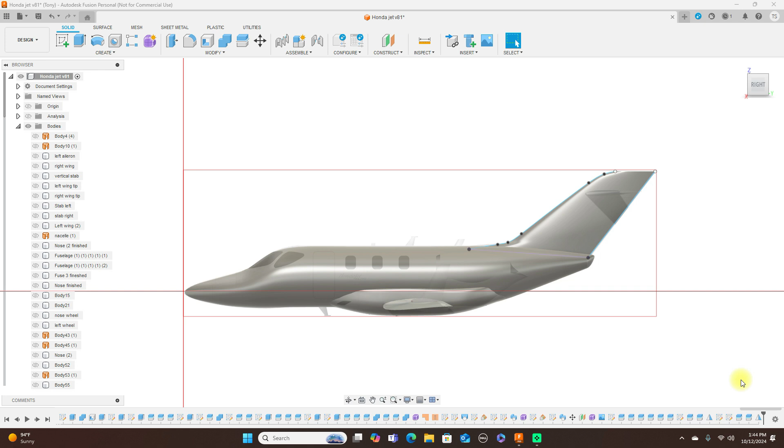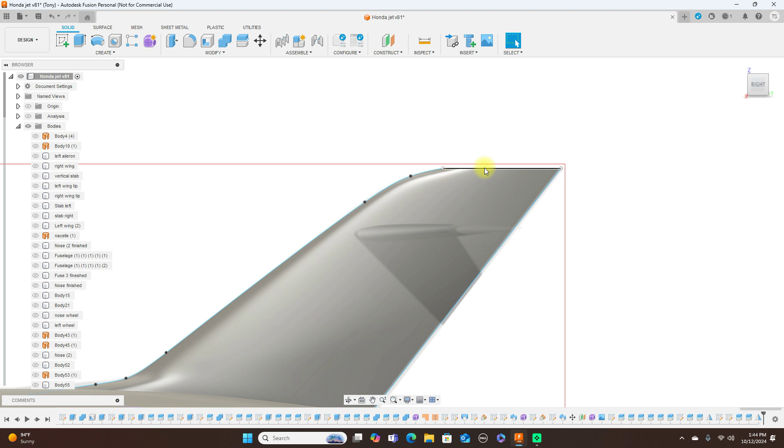We're going to do some more work on this Honda Jet. But first, one person left a question in the comments about this being flat up here, and I said I would address it. So I'm going to do that now, and it's quite simple to do.

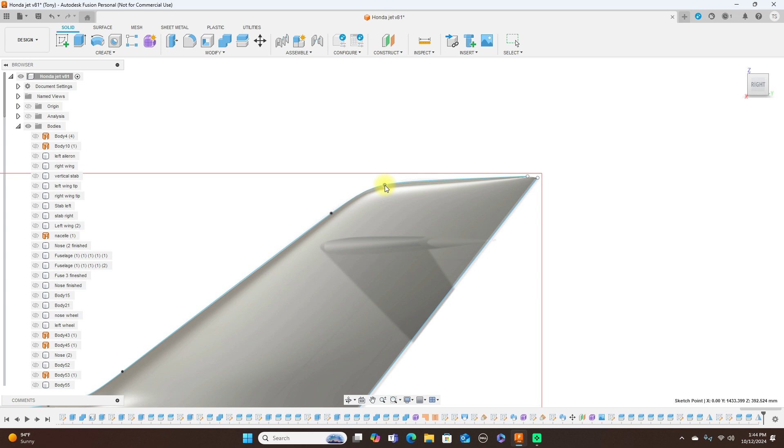Just take this and move this over. And do that. And that takes care of that.

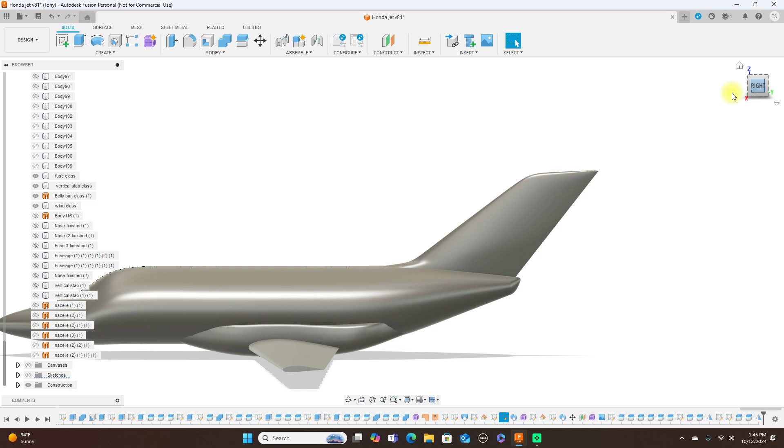So let me turn the canvases off here, and turn the sketches off. As you can see now, that's round on the top. Simple as that. I just didn't drag that all the way over when I showed you guys how to do that, but that's how you take care of that.

Okay, let me turn the canvases back on. Now turn the body off here.

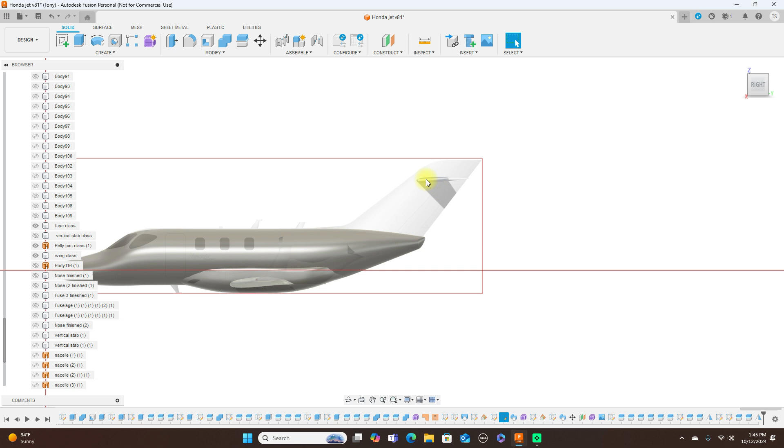What I'm going to do now is show you how to model this horizontal stab. And like my last video, I said it's done just like the wing, and I'll show you what I meant.

So the first thing I do here is create a sketch on this plane here. And I'm going to draw a line just like I did with the original wing.

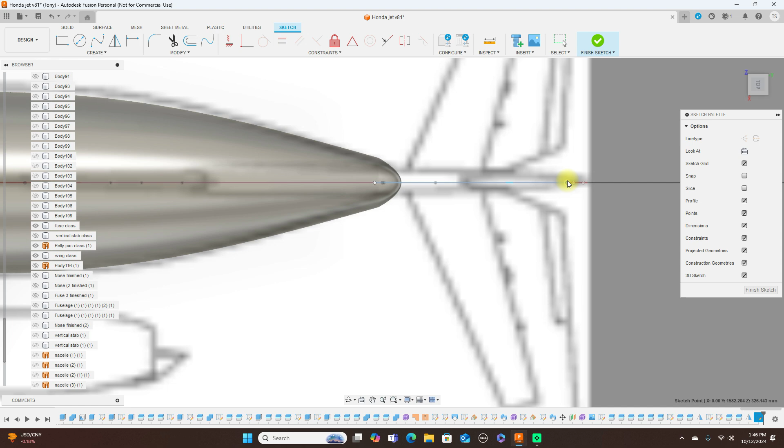And move this out like that.

Actually, I'm going to just model it to this instead. So I'm going to put that there, back there.

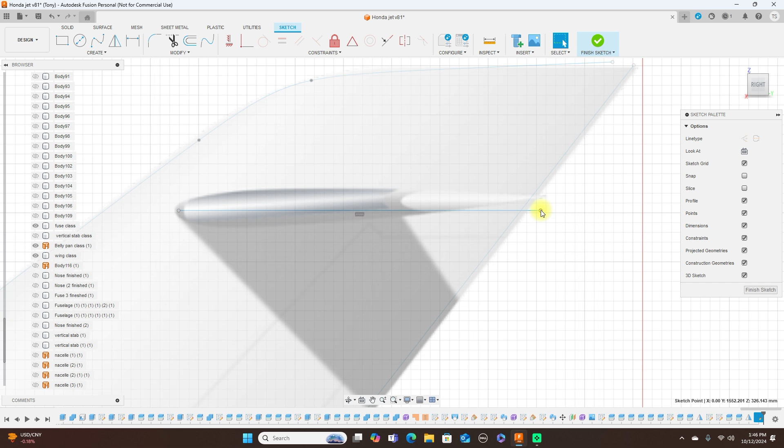And I'm going to redo this. So I'm going to delete this line here and do it again because it's somewhat at an angle here.

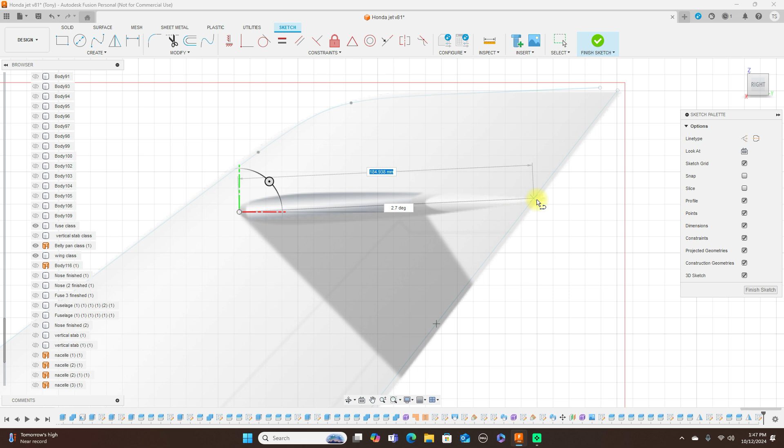Okay, now I got that. Now I'm going to use fit point spline and just sort of trace the outline of this here.

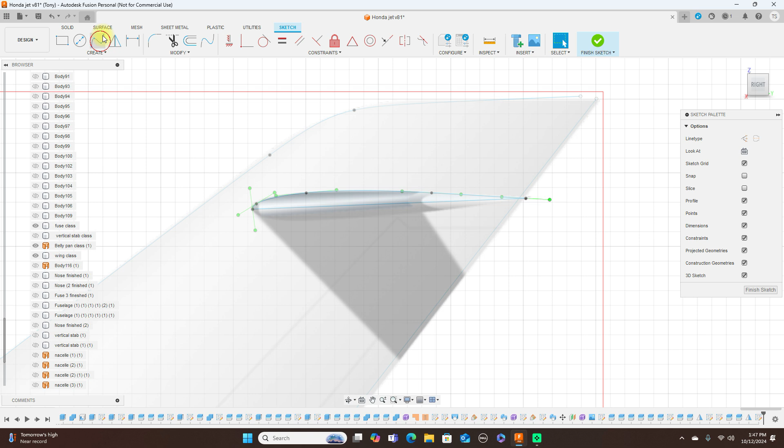And we have that, and go ahead and finish sketch. Turn the sketches back on.

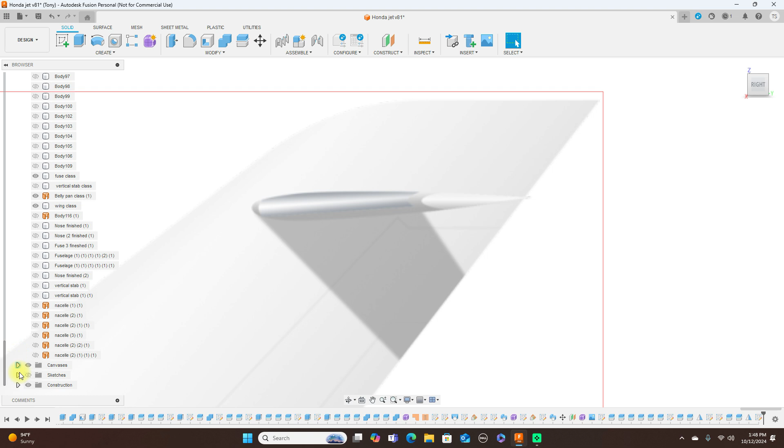And we're going to use a plane at an angle and use this line here and change this to 90 degrees here. And click OK.

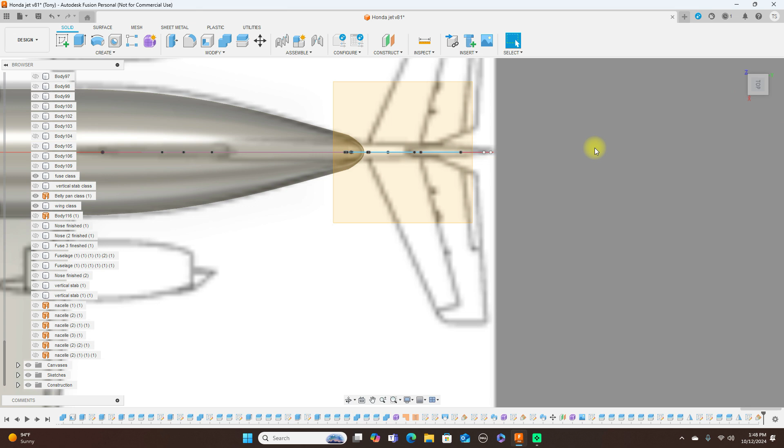Now create a sketch on this plane here. So I click the plane and click Create Sketch. I rotate this slightly. I want to make sure I get the proper line here.

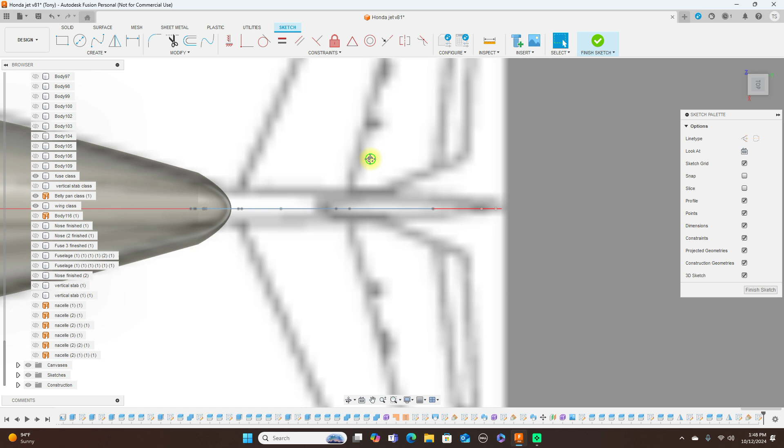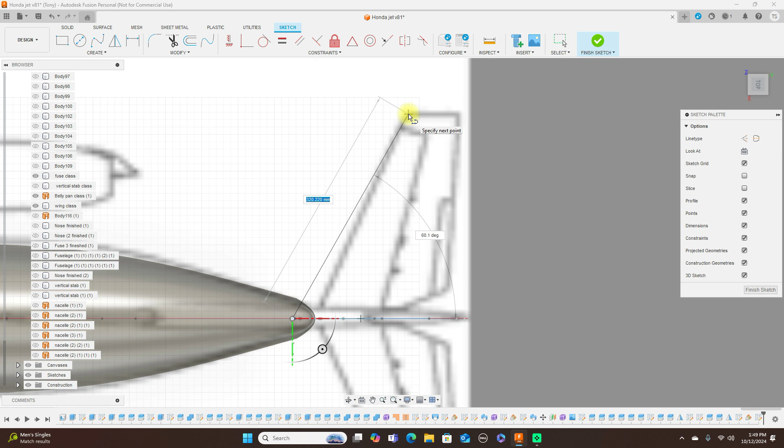Now these pictures here that I'm using, they don't line up properly, but that's okay. And then another line in the back.

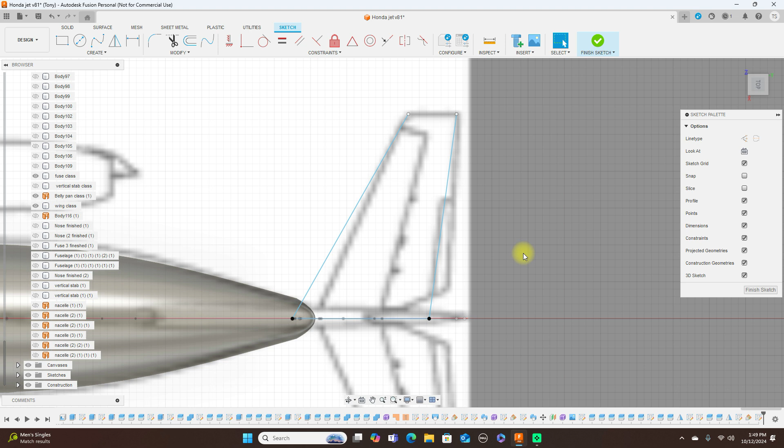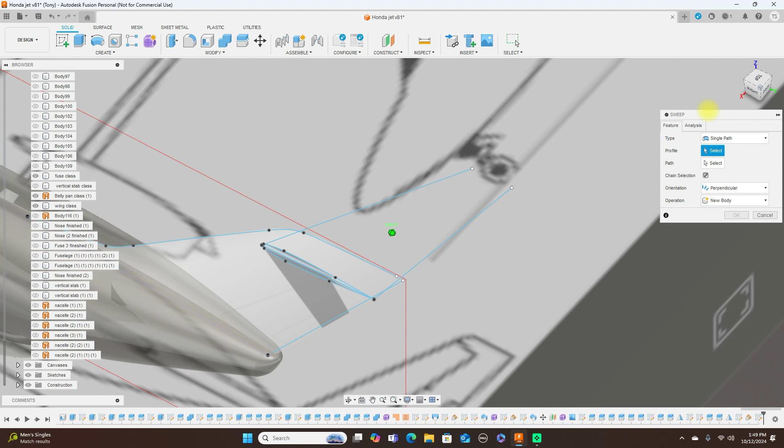Then come over to create sketch, and I'm going to use a sweep. Change this to path guide rail and select these two profiles here.

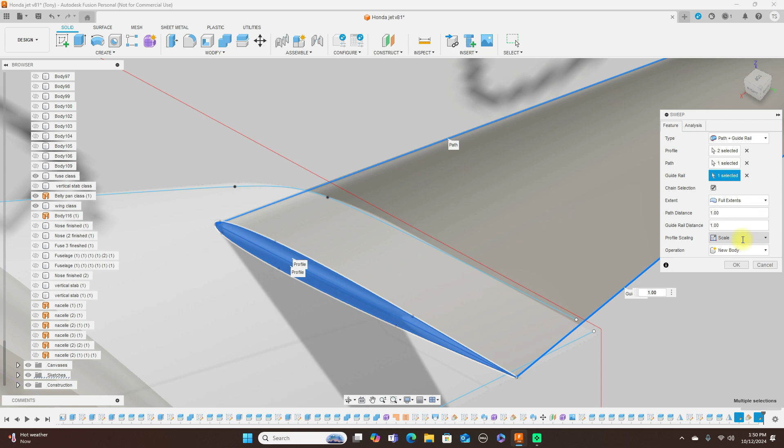This one, and click that as your path. And this back one is your guide rail, and change this to full extent and click OK.

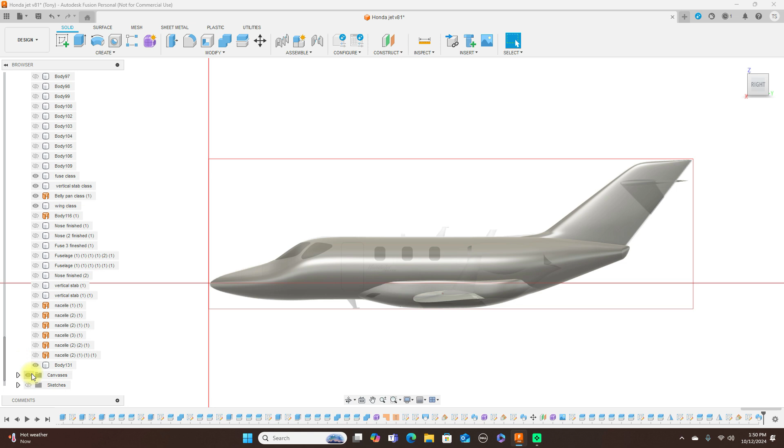Turn the vertical stab back on and turn the sketches off, and the canvas. And we have that.

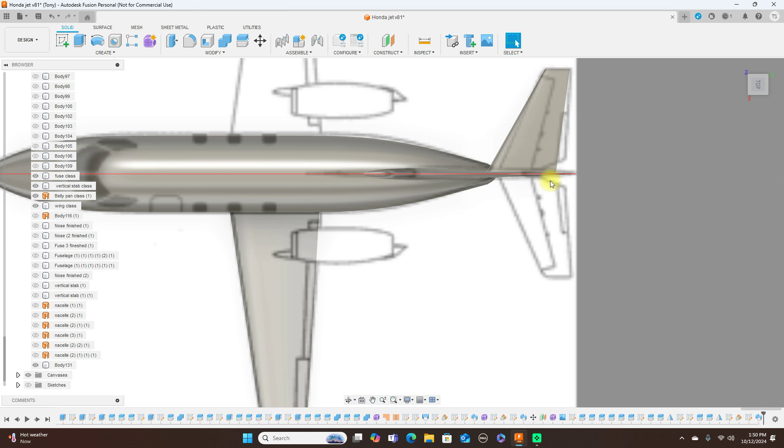As you can see, it has this cut in here like that. And to do that, we turn the vertical stab off, and turn the... not the canvas here, I meant the construction.

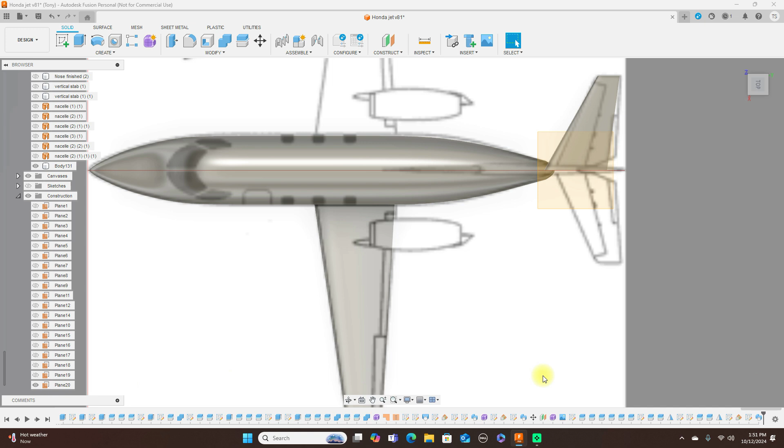And that last plane that we just created, that one, we're going to create a sketch on this plane here. Click the plane, create sketch.

And I'm going to use line tool. Click OK, finish sketch.

Turn sketches back on, and now we're going to split this body here. This body to split, and this is the splitting tool, and click OK.

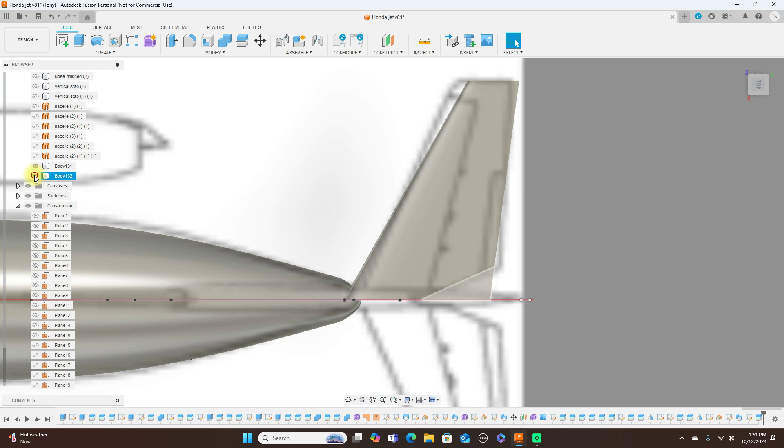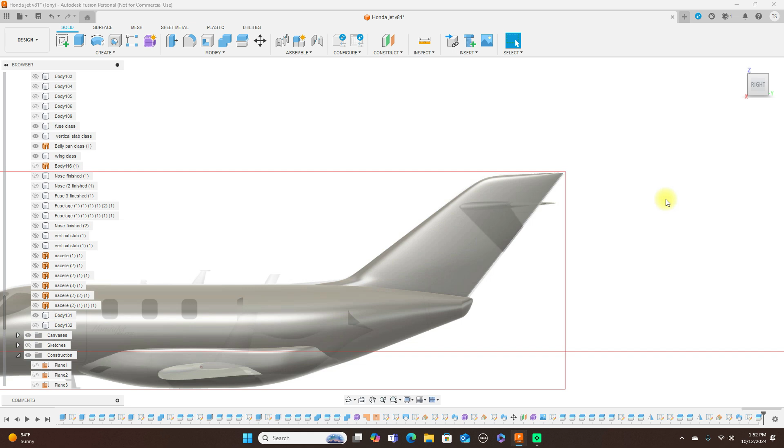And this portion here, we turn this off, and we have that. And turn that vertical, and turn the sketches off and the canvas, and we have that.

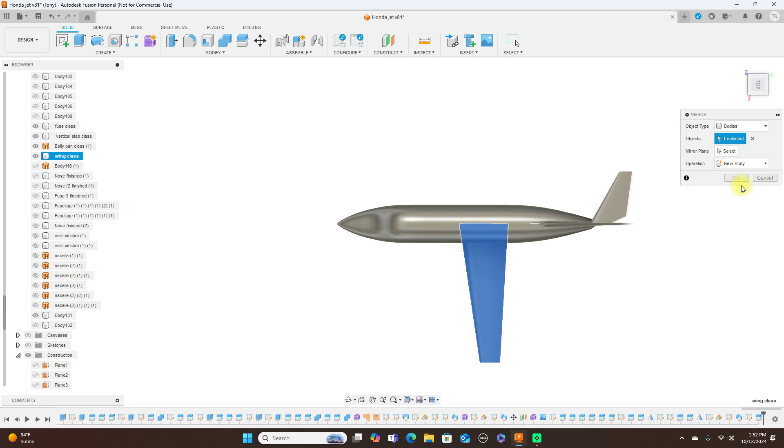So now what we can do, mirror this, and the mirror plane is going to be this, and keep this new body. Click OK.

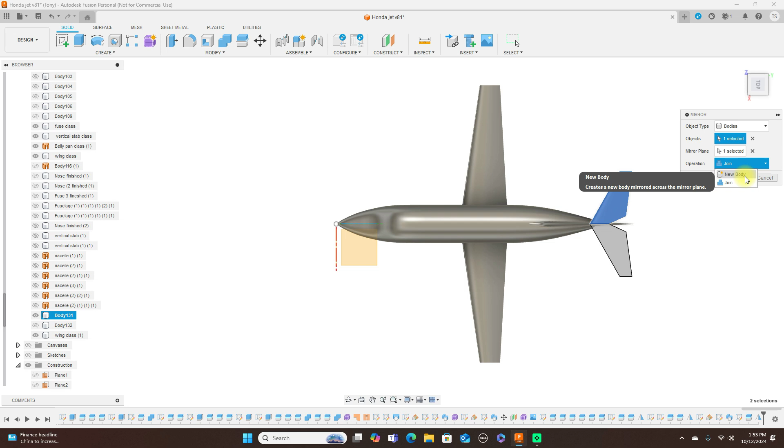And mirror again this. And we have this now.

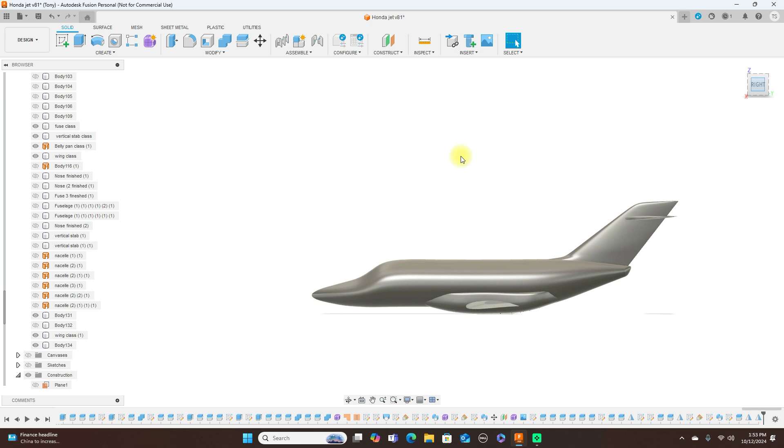Now take a look at the canvas again, and this fuselage here. I don't think it's quite right yet. Like this needs to go up a little more right here. Let's go ahead and do that.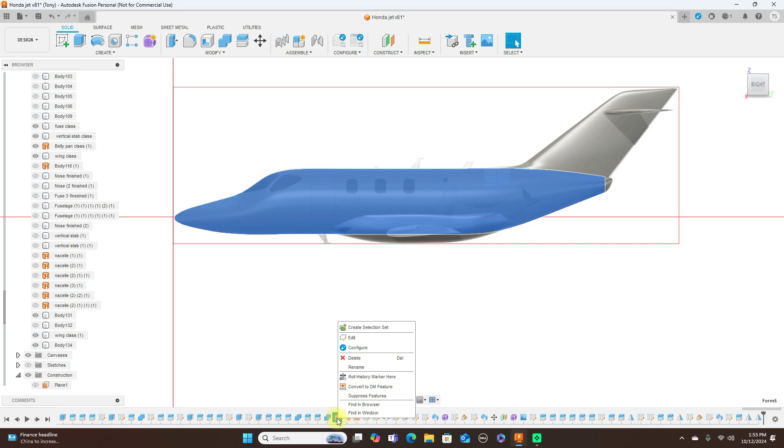Come back in the timeline and edit this. Turn the lines back on, Control 6. And right here needs to come up, what it looks like.

So I need to insert an edge right in here. So I double click this line here, come up to Modify, Insert Edge, and that's about where it needs to be. Then come over here and change this to exact, and click OK.

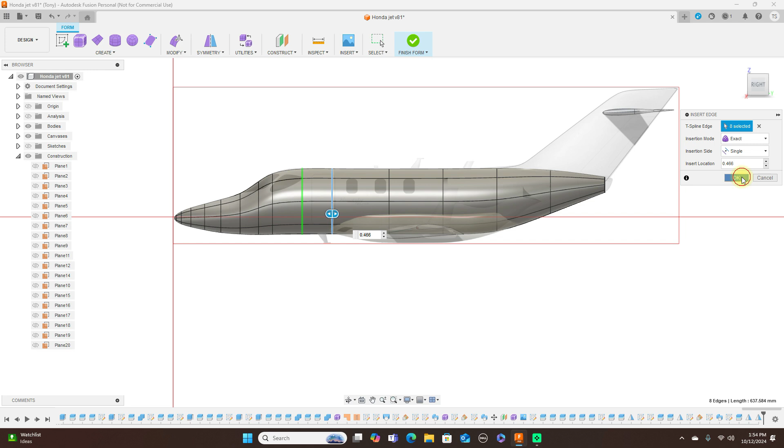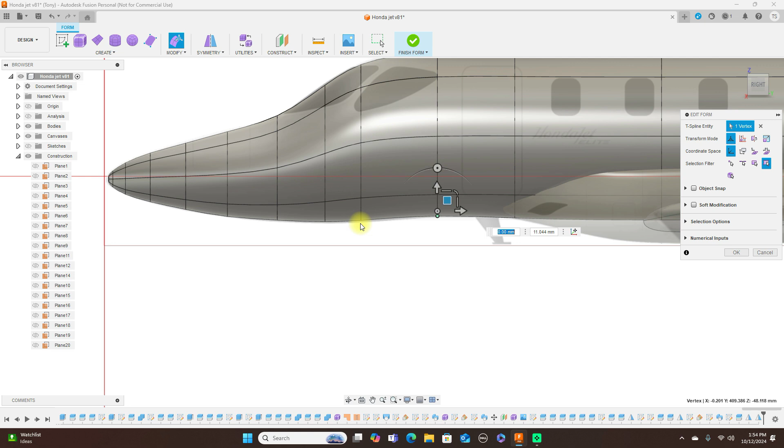Now what I can do here, select this point here and edit and move this up. And move this point slightly down.

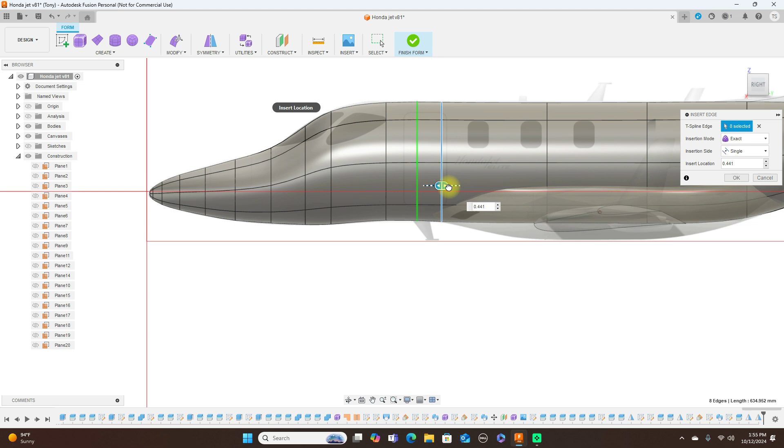And this needs to come up here too, so I'll insert another edge, about right here. Exact, click OK. Then I can click the point here, edit, and move this up.

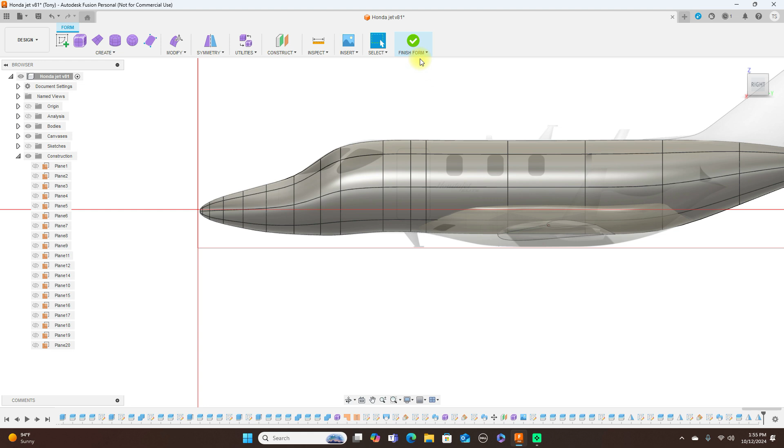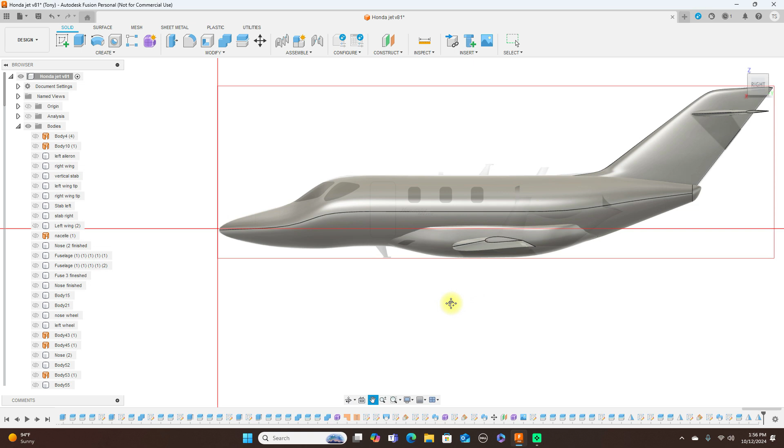And click OK, finish form. Now that looks much better. Yes, now it looks like that. Didn't look right to me at first when I came back to this. So that's how you take care of that. And the stabs up, horizontal stab.

Okay, now we're going to do a little work on the nacelle here.

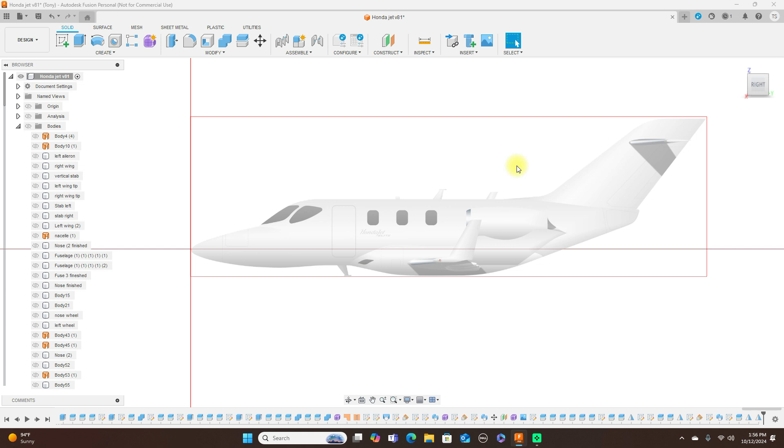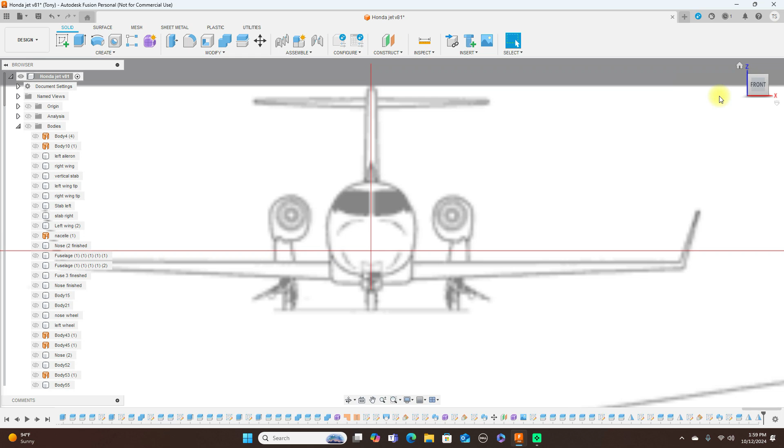So the first thing you want to do here, when I'm looking at this, okay people, sorry about that. I showed you guys how to do this in the last video, this nacelle here. But I can't really see a good outline of this bottom of it, how it's held here. So what I did, I bought a plastic model of it. And as soon as I get the plastic model, where I can actually see this whole thing, I'll show you guys how to model this, this holder that's holding this up, the engine up here.

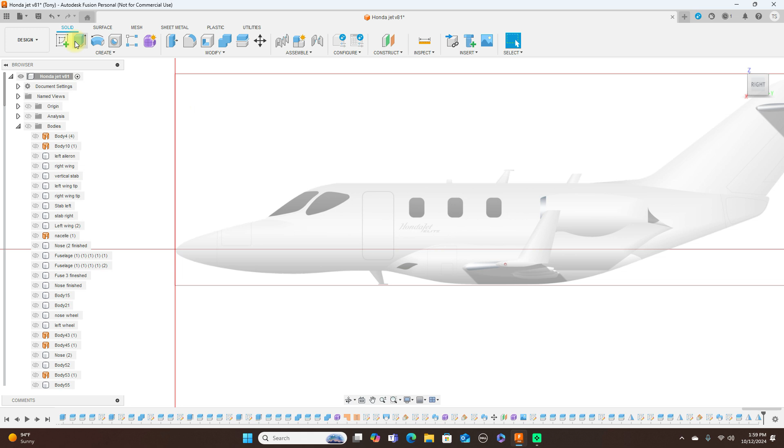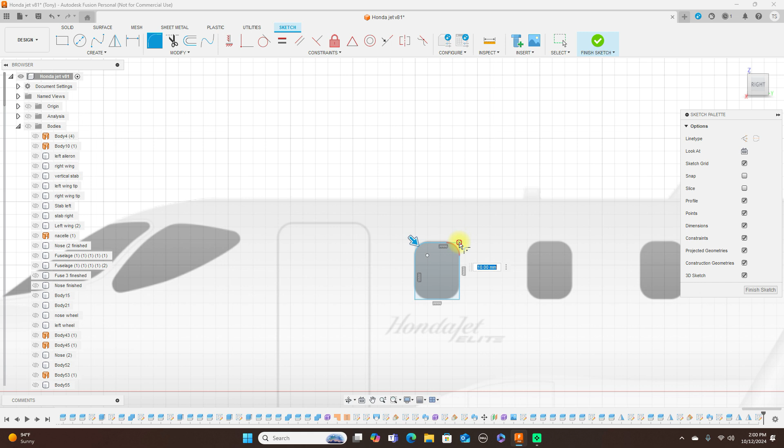So what I'm going to do now is show you how to do the windows here. So I want to create a sketch on this plane here, and I'm going to use a 2-point rectangle. And then I'm going to use a fillet on here. Finish sketch.

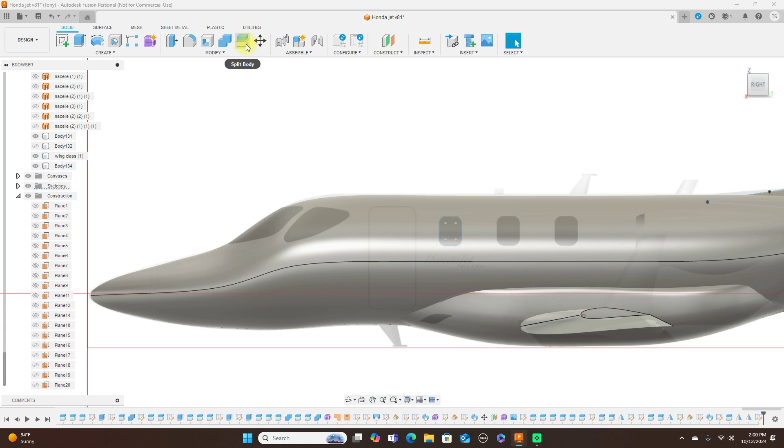Bodies back on, and turn the sketches back on. Now we want to split body. This is the body to split here, and the splitting tool is going to be this. We click OK. We have that. Now this here,

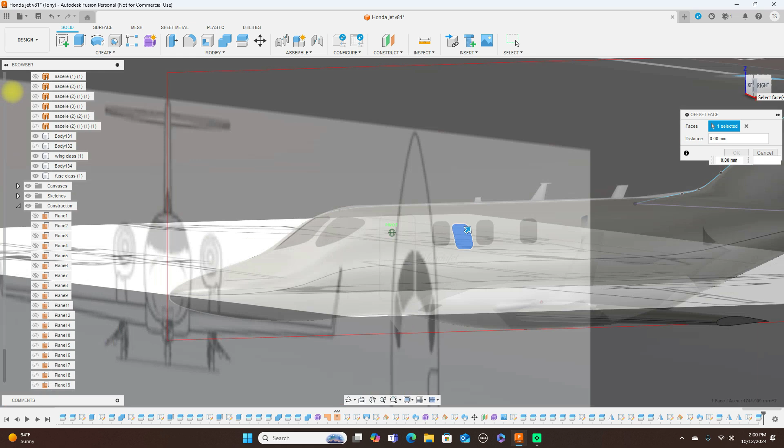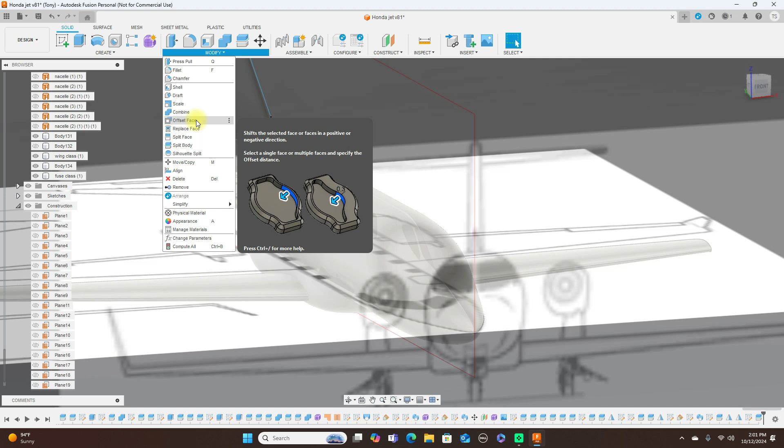I'm going to offset the faces on it, this one. And it seems like Fusion froze up on me there, so I'm going to do that again. Offset this face, and this face, and negative 1. Maybe too much, but we'll see.

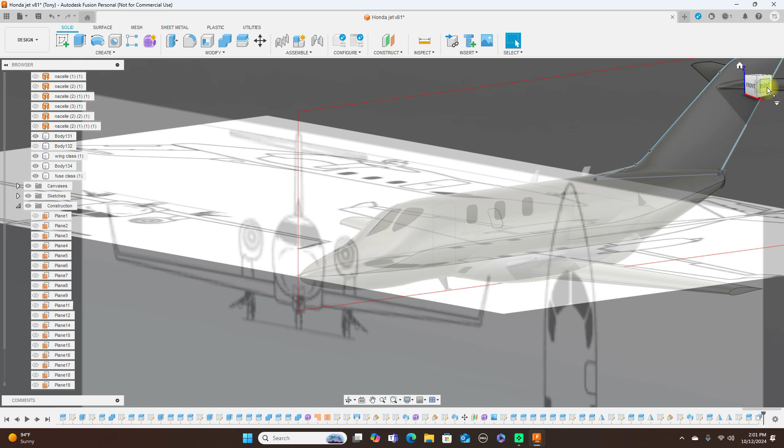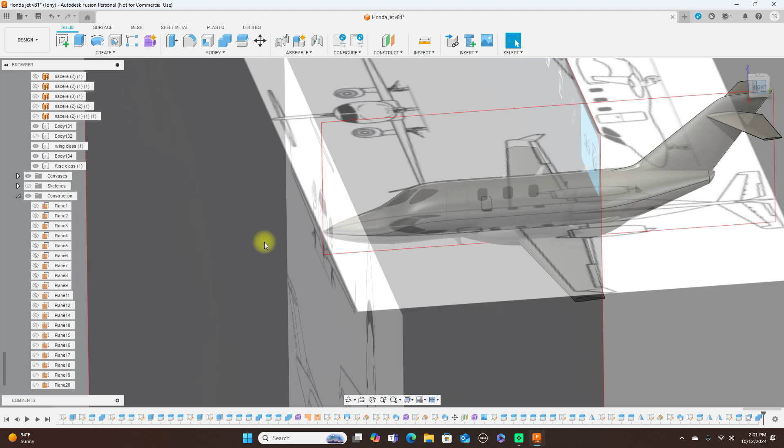Then combine this and this, and click OK. Turn off the canvases here, and we have that. And this is still all one body though, as you see.

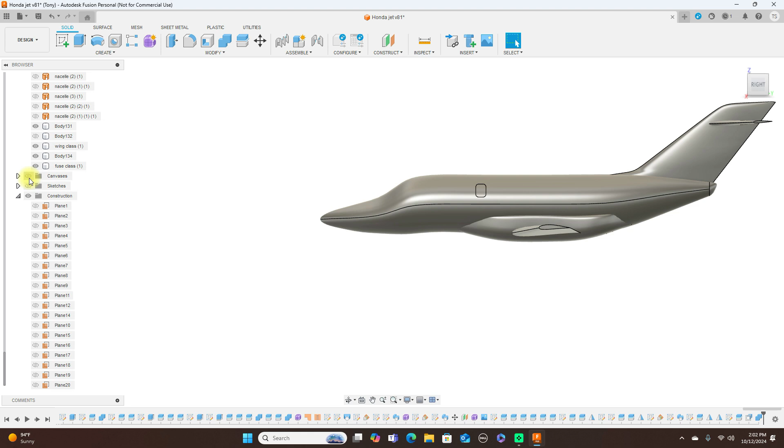And you do the same thing with the rest of these here, and the front ones also. I'll do one more of the front one here, and here I'm going to use a fit point spline.

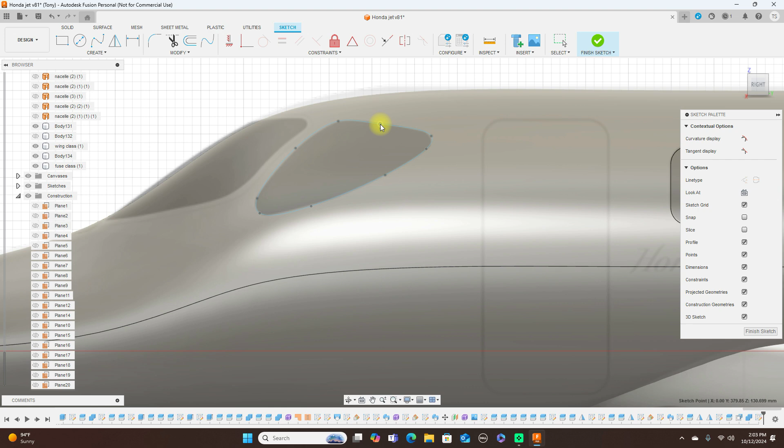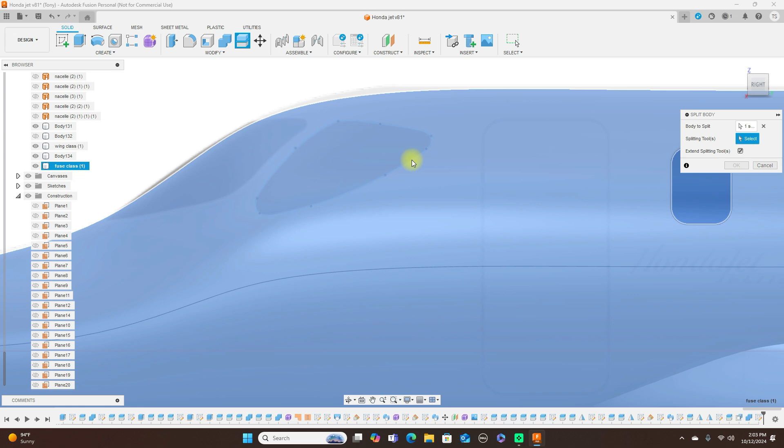Okay, and you guys can just work on this more to get it exactly how you want it. Then go ahead and finish sketch, turn the sketches back on, and again we're going to use split body. The fuselage is the body to split, and the splitting tool is going to be this sketch here. We click OK.

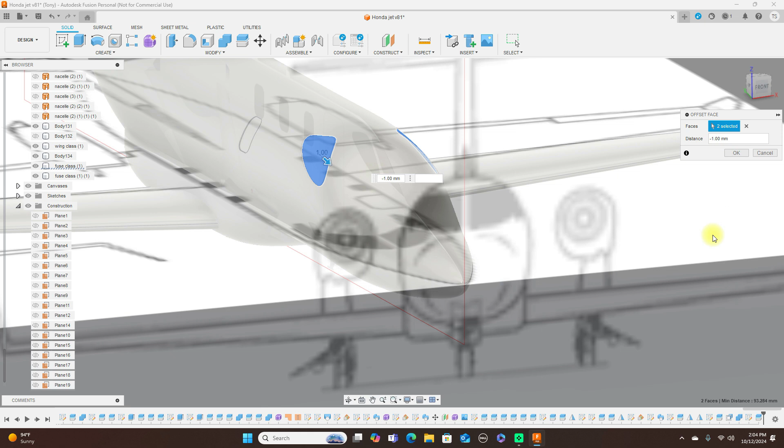Then this here again, we go into modify, and we're going to use an offset. We're going to offset this face, and this face, and again we're going to go with negative 1. And click OK.

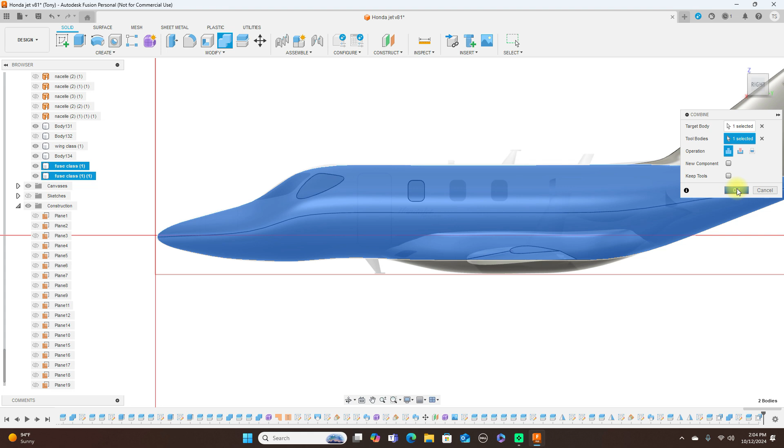As you can see, again, this is all, I've got to combine these two. This window here is combined with this already, so I'll come up here, combine. This is the target body, it's the fuselage, and the tool body will be this. We click OK, make sure this is set to join, and click OK. Now we have that.

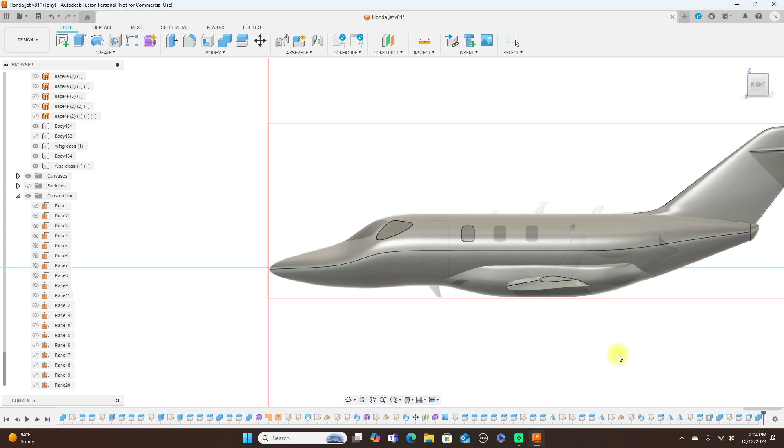And you do the rest of the windows the same way. Change this to faces. And that's how we do that.

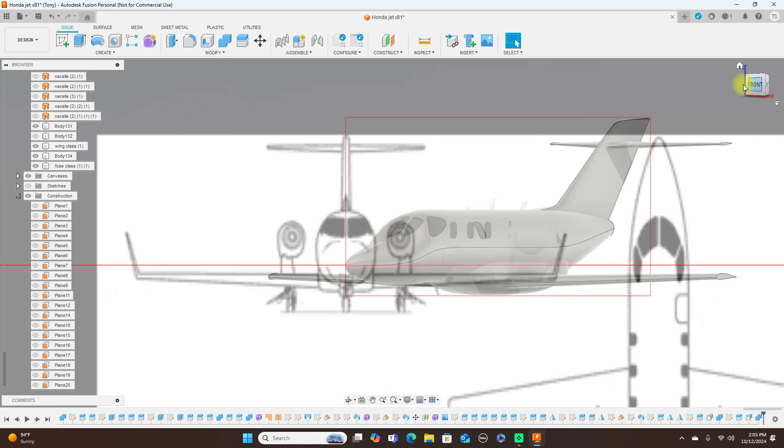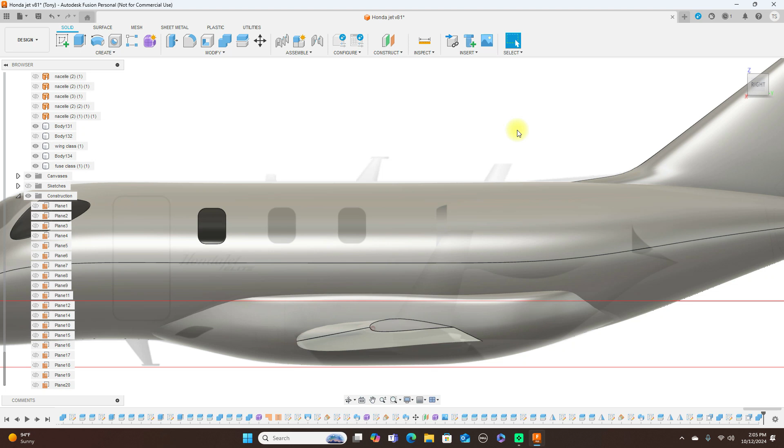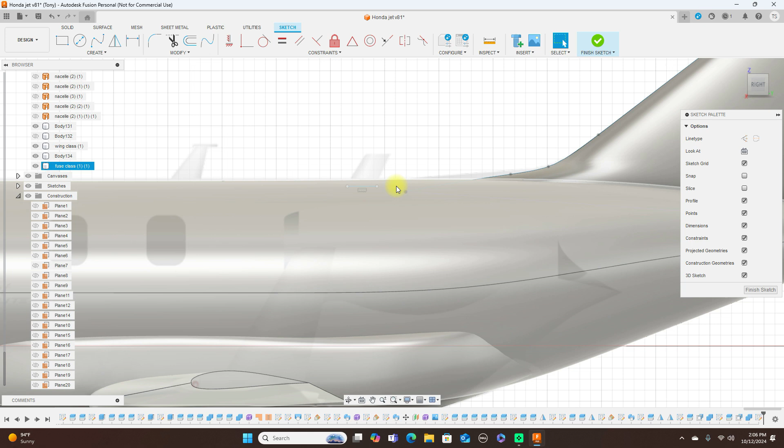Next, if you're wondering how to do these little pieces here, these are done exactly how we did the vertical stab back here, so the top one. Let's go ahead and do this back one here. So what I'll do is just create a sketch on this plane here, and I'll draw a line. Finish sketch, turn sketches back on.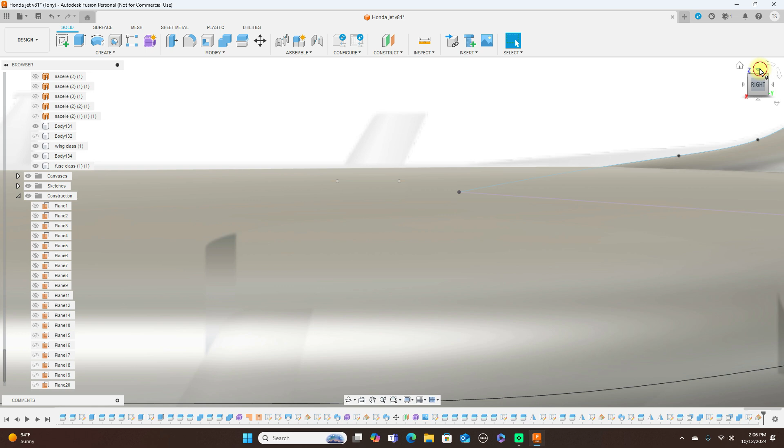Then I'll use a construction plane, plane at an angle, this here, set to 0 degrees and click OK. Then we look at the top, create a sketch on this plane here.

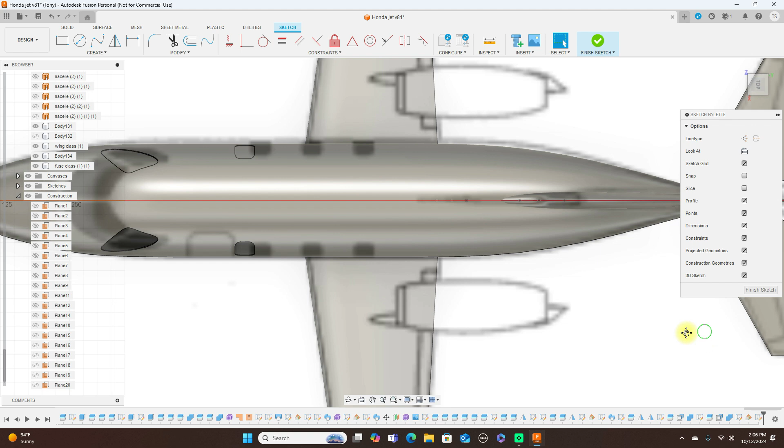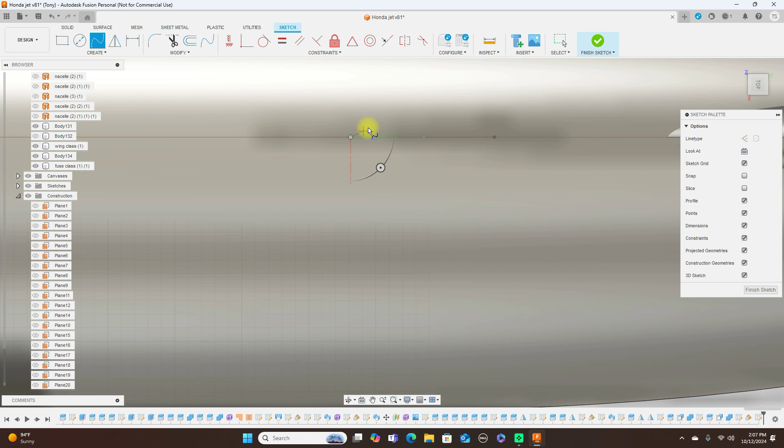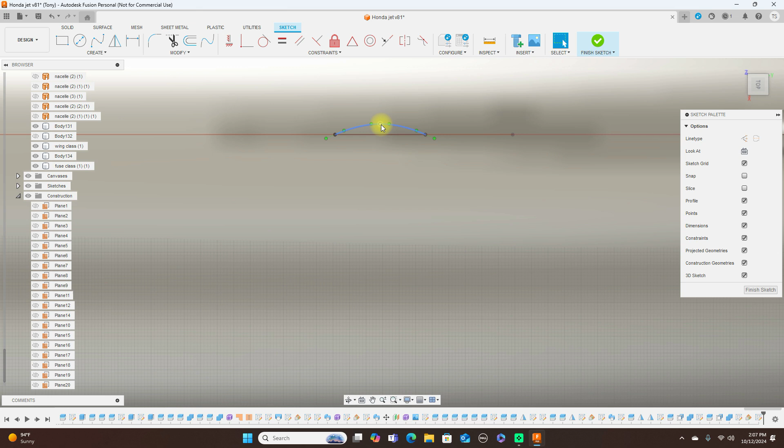And we'll just use a shape here, and a line from here to here. I'm going to mirror this line here. Finish sketch.

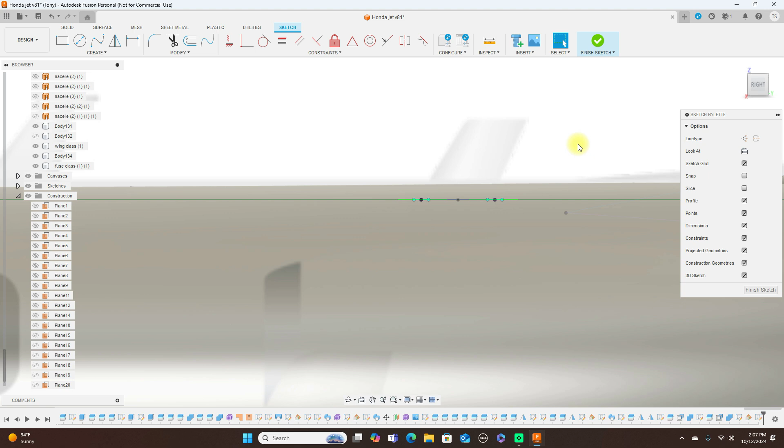Then create a sketch on this plane. And a line here to here, another line here, make sure straight across. There, go ahead and finish sketch.

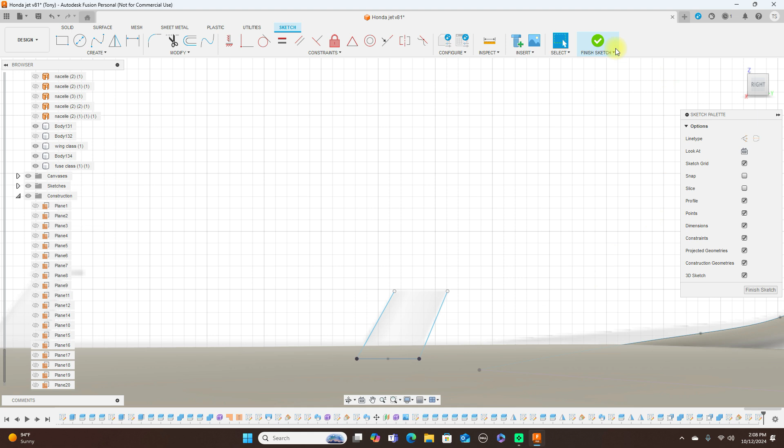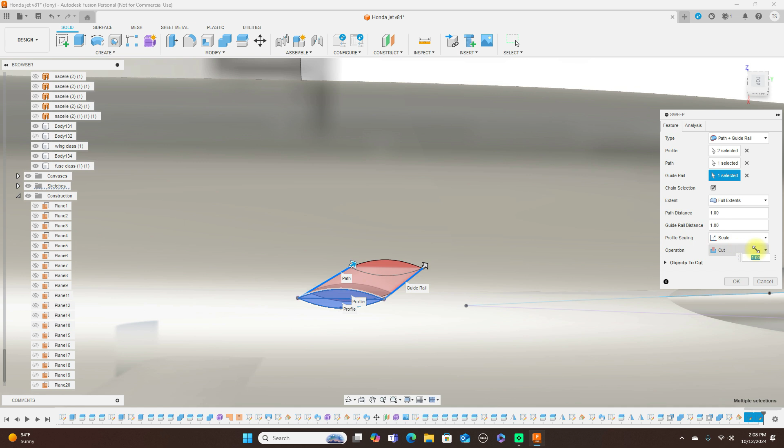Then we're going to use a sweep, and these two are the profiles. Make sure it's a new body, and click OK. Now you have that one there.

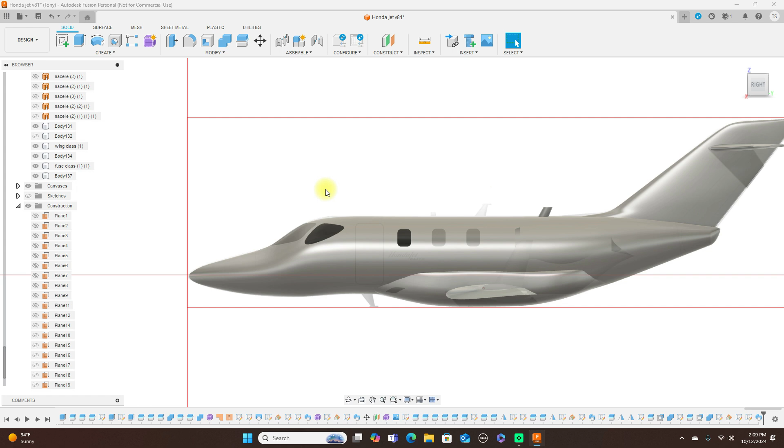And these others are done the exact same way. Let's turn the sketches off. And this is the model so far.

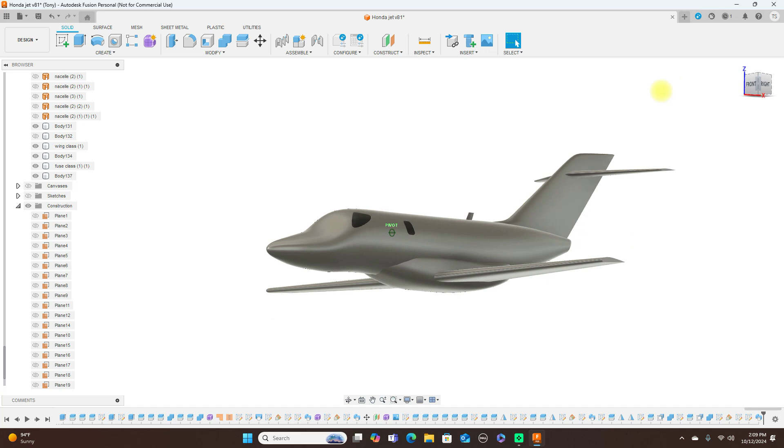And that's going to do it for this video. As soon as I get my plastic model so I can see what those mounts holding up the nacelles look like, then I'll show you guys how to model those in here. And at the same time, in that video, I'll show you guys how to do the wing tips here also.